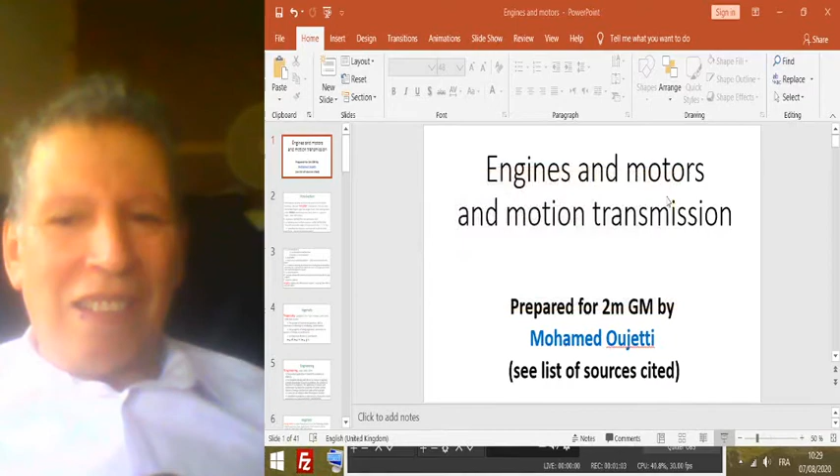Etymologically speaking, and according to the Merriam-Webster dictionary, this dictionary is an American dictionary. It was compiled and made by an American lexicologist by himself, so it is named after him. As you can see, there are people who are very committed to their own languages, to their own mother tongue, and they have devoted their lives to compile dictionaries.

The same thing could be said about Monsieur Littré. Le Littré is a French dictionary written by one man, and it's one of the best. By the way, he was a clerk in a bank, I suppose, and he had this passion for language, and he made a dictionary for himself. So this is a hint to whom it may concern.

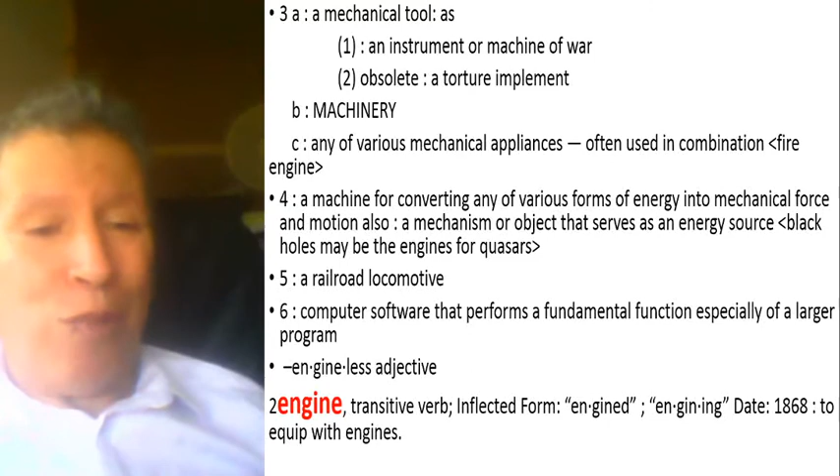There is the adjective engineless, without an engine. And engine, to engine as a verb, is a transitive verb, inflected form engined, to engine. يعني مشتقة من كلمة to engine. Engining. So it started in 1868, and it means to equip with engines, to engine a vehicle, to equip it with an engine.

Ingenuity means the power of creative imagination. So again, now we have the element of imagination and creativity, to create something that did not exist before, to create something useful for humanity, to use your imagination, to use your skill, to use your intelligence, your creativity.

And it also means the skill or cleverness in devising or combining things, in making, putting together, in combining. So these are the qualities at the root of engineering, the gifts that an engineer should have. This is what distinguishes an engineer from an ordinary person. Ingenuity means inventiveness, so an engineer must be inventive, must come out with new ideas, with new solutions.

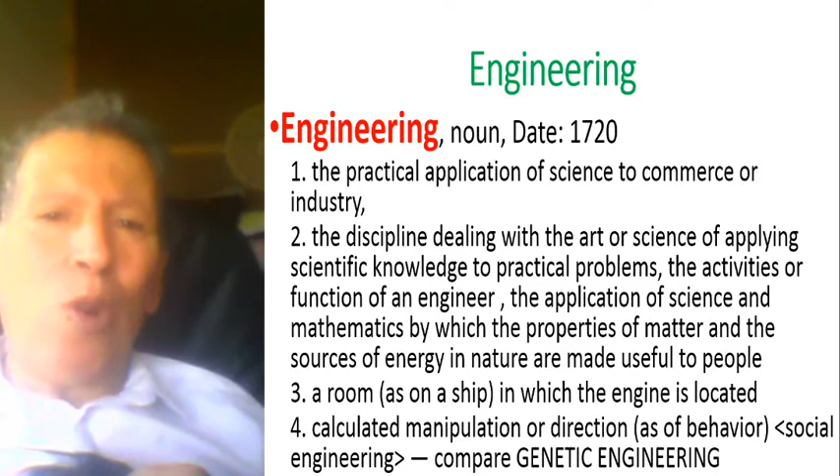An engineer is therefore a noun, pronounced engineer. Look at the stress: there's a weak stress at the beginning and a major stress on the last syllable. Etymologically, it comes from Middle English, engineour.

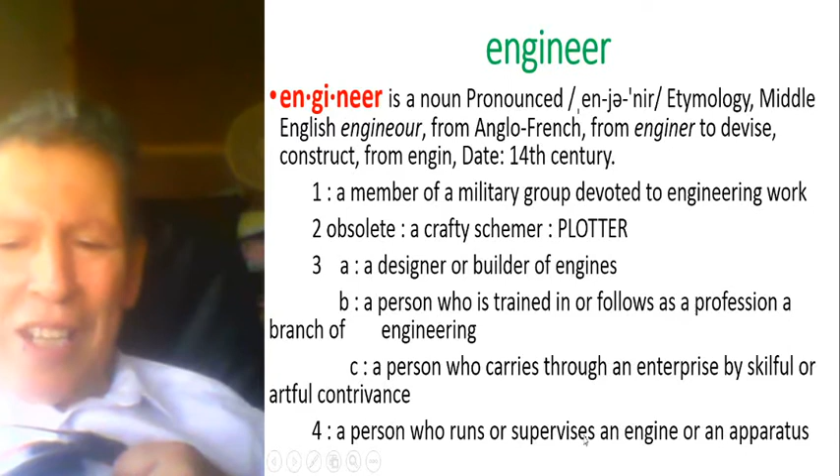Yes, what we call here technician, in the United States they call them engineer as well. So the borderline between engineer and technician is blurred, is removed, because an engineer is someone who supervises a machine and who runs it, is skillful at that, has a certain knowledge of engineering, and therefore does so. Many engineers in the full title do just jobs of supervision and running of engines.

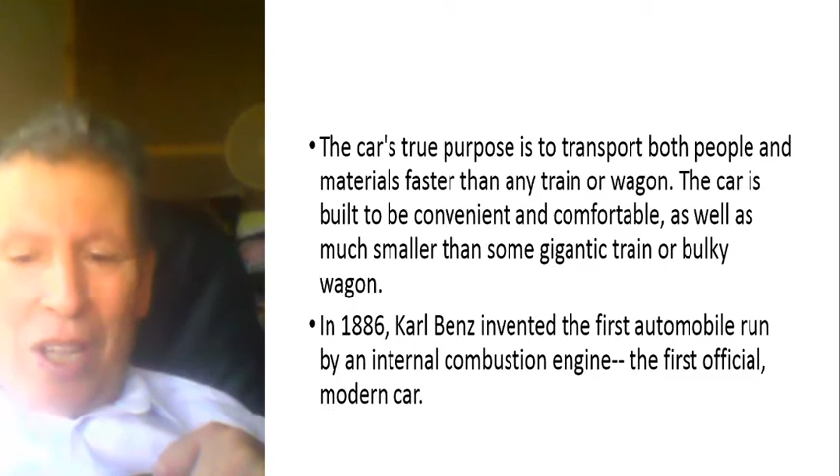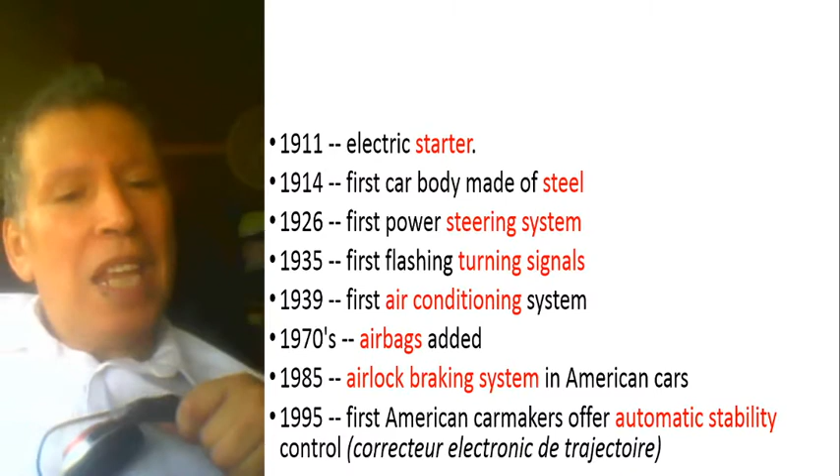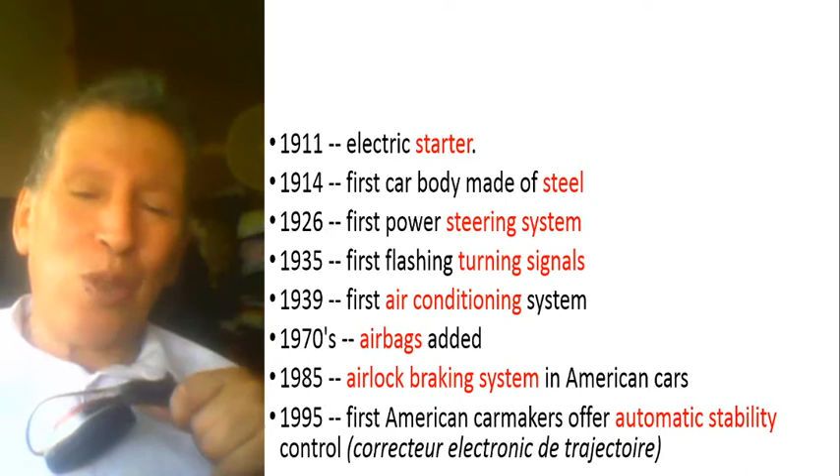1939, the first air conditioning system. I didn't know that - so early. But it was developed much better later. In the 1970s, the airbag was added. But again, the airbag went through different phases until it became as efficient and sensitive as it is today.

1985, the anti-lock brake system in American cars. Something to do with a braking system that has to do with hydraulics, which are airtight, no air in them.

1995, the first American car makers offer automatic stability control, which corresponds to 'correcteur électronique de trajectoire', to give the car more stability.

So the cars were first built to transport people and goods quickly and efficiently. This is the purpose, the objective for the engineer, to help humanity achieve certain things.

How people use it has yet to change from how they used it back then. They used it in the Great Depression, in the First World War, and they still use it in wars nowadays. It's a very important means of war. You can just have a look at what happened in Libya, those Toyotas.

Playing an important role, the car is built for the transportation of goods and people cross country, throughout countries. The earlier car was obviously not built for long distance as it used to inhale a lot of gasoline, but modern cars are very fuel efficient. Yes, the earlier cars were very greedy, guzzling, but nowadays they are more efficient, and a lot of work has been done in this area.

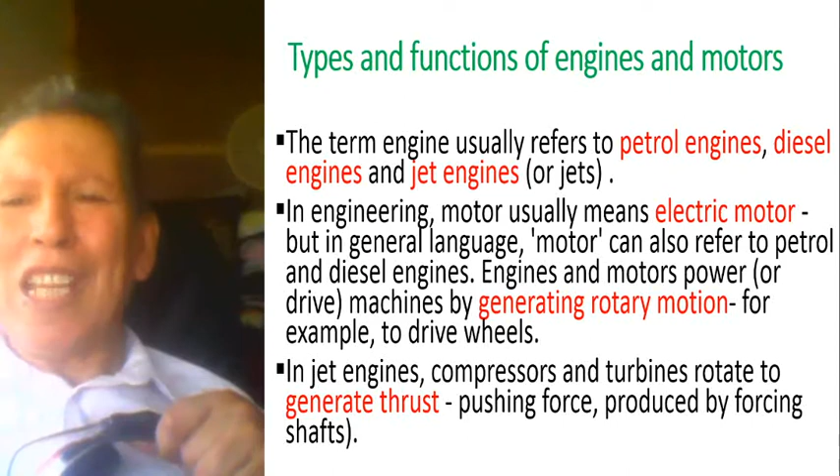The term engine usually refers to petrol engines, which is 'moteur à essence', diesel engines, and jet engines. The modern meaning of the word engine is used with petrol engines, diesel engines, electric engines, electric motors, and jet engines.

In engineering, motor usually means electric motor. So the word engine and the word motor: motor goes with electric, and engine goes with fossil fuel.

We could say automobile as much as we can say motor car, the word motor is interchangeable. Anyway, in engineering, motor usually means electric motor, but in general language, motor can also refer to petrol and diesel engines. Engines and motors power or drive machines.

They power machines by generating rotary motion, for example, to drive wheels. This is the job of an engine or motor, to create rotary motion, which is transmitted to wheels to create movement.

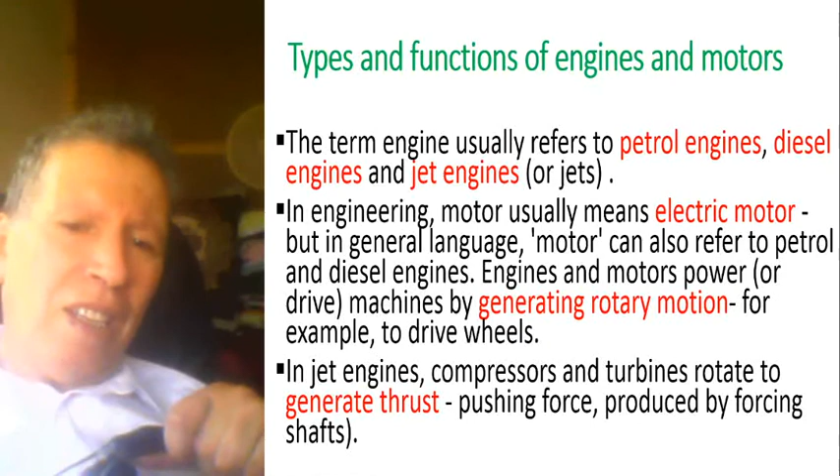In jet engines, compressors and turbines rotate to generate thrust, a pushing force produced by rotating shafts. So 'le moteur à réaction', a different system. Compressors and turbines rotate and generate thrust, they push air in the back so as to push the airplane forward.

How do we measure torque? And what is torque? We measure it in Newton meters. As an engine produces a couple, a rotary force, the moving parts of the machine it is driving will produce resistance due to friction and other forces.

As a result, torque, the twisting force, creating the movement, the twisting movement, is exerted on the output shaft of the engine. Torque, calculated as a turning moment in Newton meters, is therefore a measure of how much rotation force an engine can exert. So torque is the twisting force, measured in Newton meters.

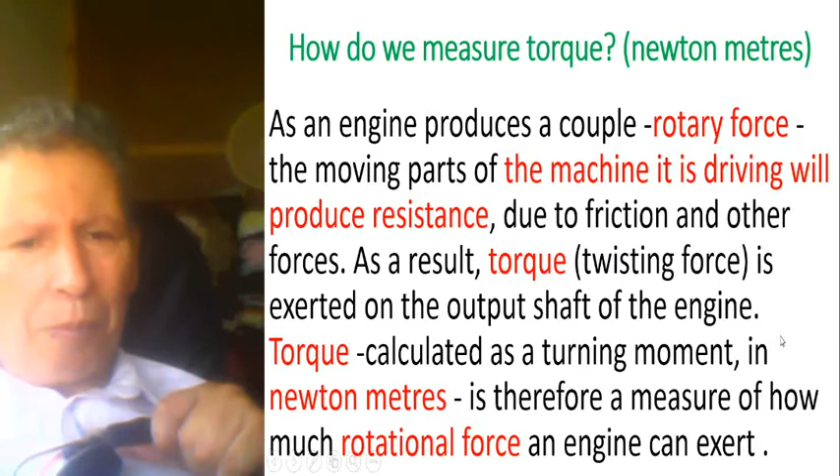And how do we measure engine power? We measure it by watts or brake horsepower. The rate at which an engine can work to exert torque is the power of the engine, measured in watts. So the unit of measurement of the rate at which an engine works is the watt.

Horsepower is a historic measurement of the power of an engine's output shaft, measured in horsepower.

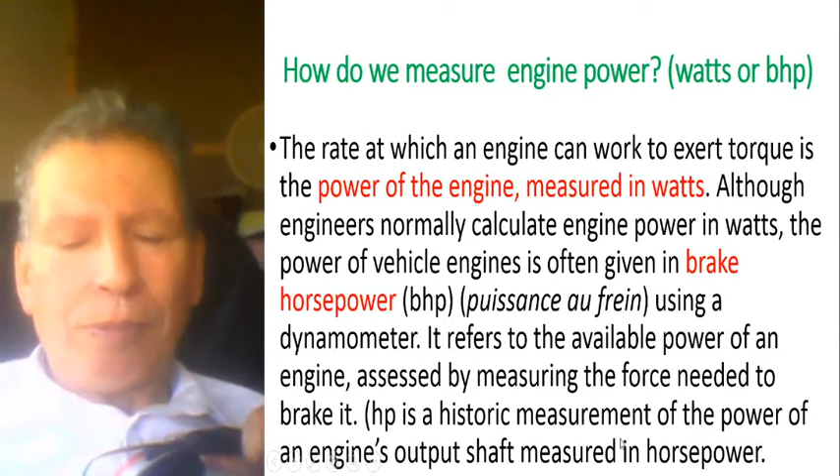Let us differentiate between certain words. British English: petrol, which means 'l'essence'. In American English, it's called gasoline. Gasoline in American English means petrol, and in British English it's called petrol. And 'le pétrole' in French is petroleum. In British English: petrol engine. In American English: gasoline engine, gas.

There is another German called Rudolf Christian Karl Diesel, who lived between 1858 and 1913. He was a German inventor and mechanical engineer, so he's an ancestor for you. He was famous for the invention of the diesel engine and for his suspicious death at sea. Well, that's none of our business, he was probably murdered, but anyway, you can read about that if you want. So he's very well known for inventing the diesel engine.

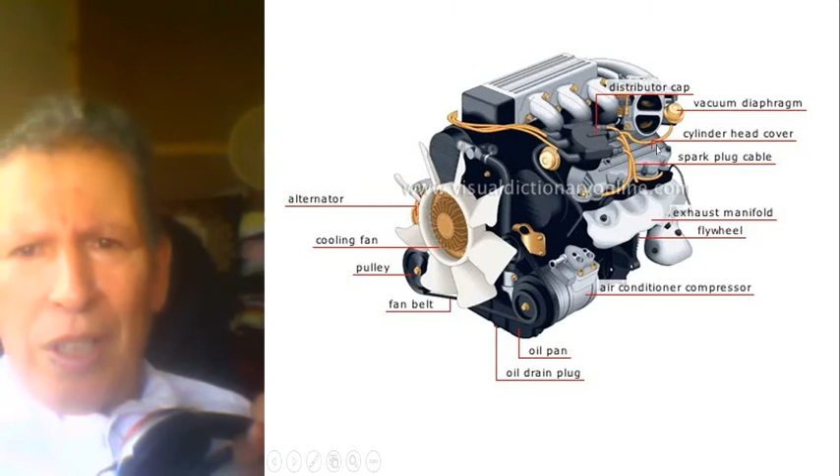The spark plug cable. These are cables for the sparks. There should be four normally, four plugs. 1, 2, 3, 4. So there are four. Distributor cap.

The vacuum diaphragm. Cylinder head cover. So there are four cylinders at the bottom, and this is the cylinder head cover.

Air conditioning compressor. So this is not an alternator. The alternator is on the other side, and this is the air conditioning compressor. So they are all used by one or several belts. So these are words for the parts of an engine.

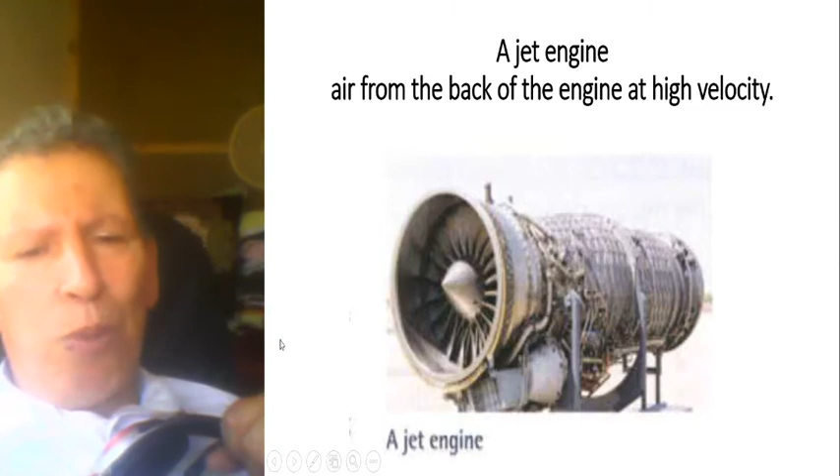Internal combustion engines. Petrol and diesel engines are internal combustion engines. So there is a burning which takes place inside the engine. This means they are driven by combustion, by burning of fuel in enclosed sealed spaces called combustion chambers.

I think this is a very clever thing to think of in the first place. Somebody imagined how to burn fuel in an enclosed chamber to produce movement, to produce an explosion, and to exploit that explosion to produce movement. This is very ingenious indeed.

In petrol and diesel engines, the combustion chambers are cylinders, surrounded by a cylinder block and closed at the top by a cylinder head, as we have just seen in the picture. Each cylinder contains a piston.

It's a very complex device, isn't it? It must have been very difficult to create and to make.

The number of piston cylinders in an engine varies. Engines in small motorcycles have only one, like the 103 for example, which has one piston.

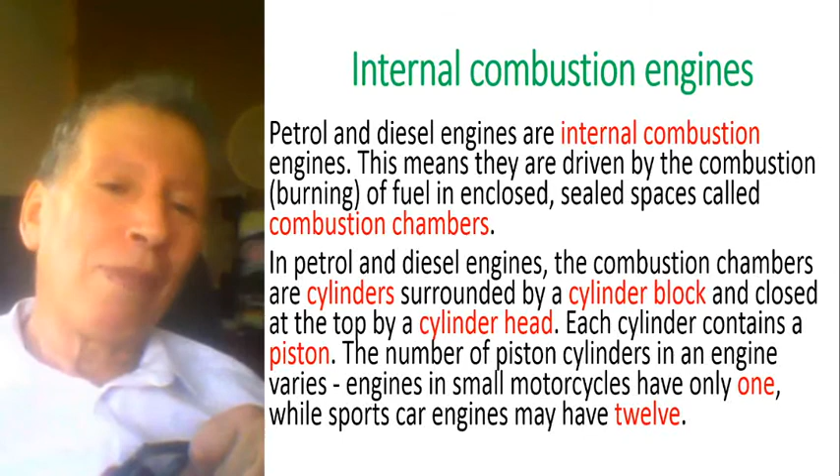While sports car engines may have 12, but ordinary cars have 4.

Fuel is supplied to each cylinder from a tank, a reservoir. In most engines, the flow of fuel is generated by a pump, the fuel pump. So there is a pump which regulates the flow of petrol to the engine, which forces it at

high pressure through fuel injectors. These vaporize the fuel, allowing it to mix with air.

So there is an operation of vaporization of the fuel. It needs to become vapor, not liquid. It needs to mix with air to become sort of gas.

Allowing it to mix with air, using this mixture of fuel and air, most engines function as 4-stroke engines. It is called 4-stroke engines, meaning they work on a cycle of 4 stages, 4 strokes, moving in 4 phases. This means they work on a cycle of 4 stages or 4 strokes.

A stroke is an upward or downward movement of a piston. So up and down, plus 2 more.

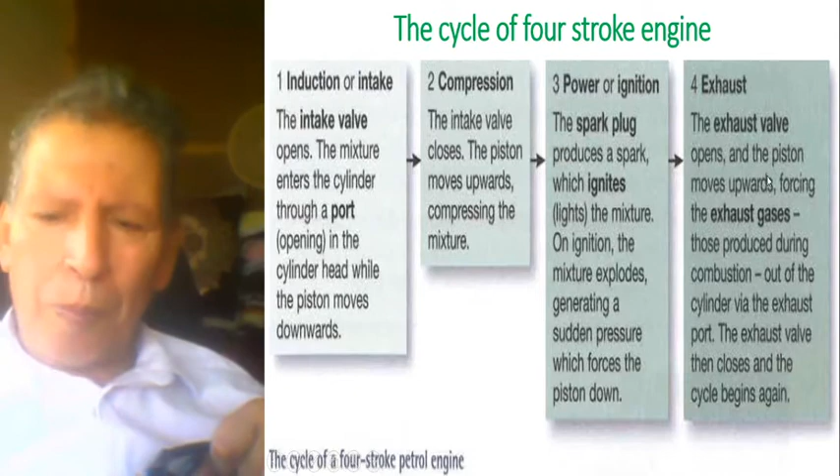So the 4-stroke engine: induction or intake, compression, power or ignition, and exhaust. I don't need to go on through all that.

Now let me move on to transmission of movement. And transmission is done through gears - gears meaning the toothed wheels, the clutches.

A set of toothed wheels, a gear is a set of toothed wheels that work together to alter the relation between the speed of a driving mechanism.

So it's not enough to create an engine, an internal combustion engine. It's already a complex thing. You need to devise, to find a way how to transmit the movement from the engine to the wheels of the vehicle. So you need gears.

Gears are very important, an important piece here. So they are a set of toothed wheels that work together to alter the relation between the speed of a driving mechanism, a mechanism which drives, such as the engine of a vehicle or the crank of a bicycle.

So it's the same thing with a bicycle. The only difference is that the movement in a bicycle is created through a physical pressure on the pedal.

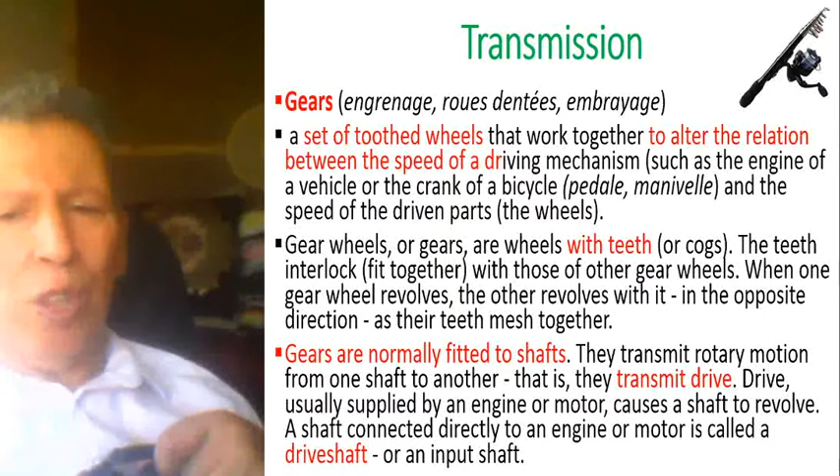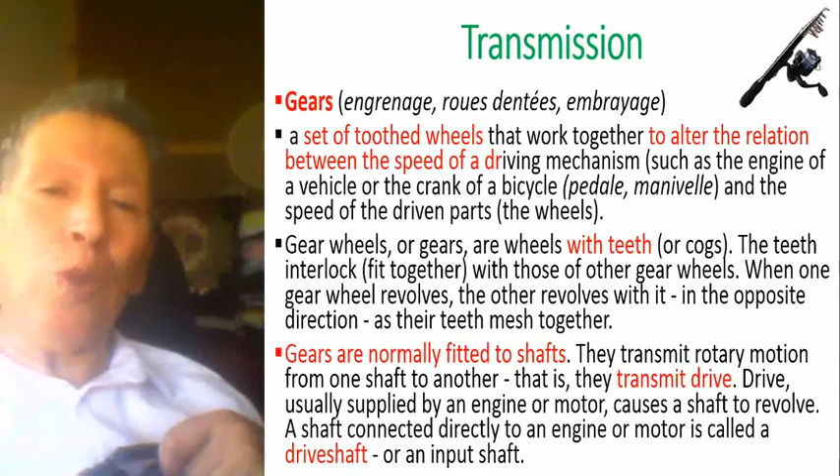A shaft connected directly to an engine or motor is called a drive shaft. The one which is fitted to the engine is called the drive shaft or an input shaft. So there are input shafts and output shafts, drive shafts and followers. A gear wheel on a drive shaft is called a driver.

To drive means to make something move, to push, to activate. A gear wheel on a drive shaft is called a driver. The second gear wheel, which meshes with the driver, is called a follower. So driver, follower. The driver drives the follower, and it cannot be the opposite.

An assembly of several shafts and gear wheels is called a gear train, or transmission system. Transmission of movement begins with an input shaft and ends with an output shaft. I hope this is clear, understandable, and memorable, especially memorable.

The system may contain idler gears, intermediaries, that is, they are intermediary, middle gears. These change the direction of a follower.

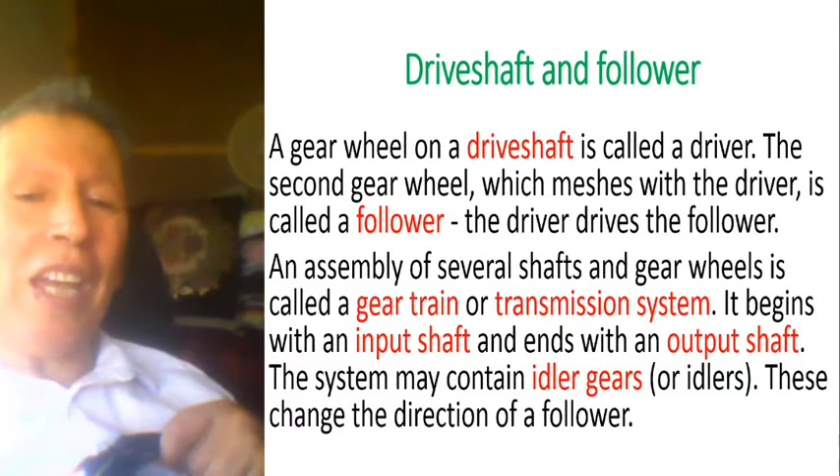Like this: here we have a driver which goes in the clockwise direction, but the follower is going in the counterclockwise direction. There's a shaft here and a shaft there to take the movement in that direction.

However, here we have a driver clockwise, the idler in the opposite direction. However, the next follower is going in the same direction as the drive shaft.

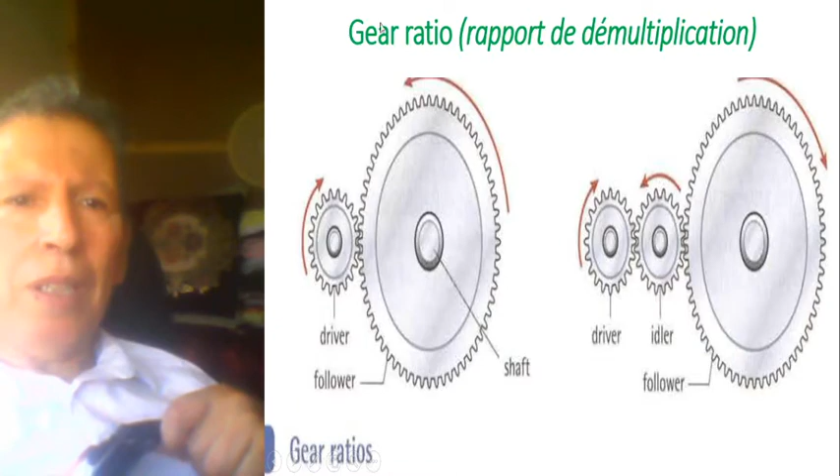Gear ratio, which means rapport de démultiplication. Gears can provide a mechanical advantage by using different gear ratios, that is, not the same speed, not the same ratio of movement.

In the diagrams above, the driver has 20 teeth and the follower has 60. Therefore, the driver rotates 3 times to make the follower rotate once, so the gear ratio is 3 to 1. This means that if, for example, the input speed, the speed of the driver, is 3000 RPM, the output speed of the follower is 1000. It's a third of the original.

And of course, you can change that. You can change them by making the follower with a larger number of teeth or cogs, or with a smaller number of teeth or cogs, small in size.

Okay, let's move on to talk about manual versus automatic gearbox. In some machines, a gearbox, la boîte à vitesse, is used to provide a number of different gear ratios. This is the job of the gearbox: la boîte à vitesse, 4 vitesses, 5 vitesses, 6 vitesses.

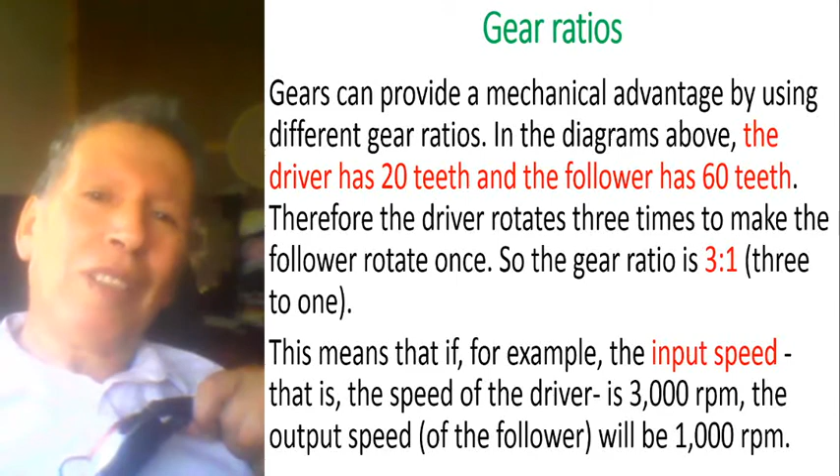Therefore, the driver rotates 3 times, etc. So in some machines, a gearbox is used to provide a number of different gear ratios. A gearbox has a gear selection system, so you need to select.

You have the gear stick, which allows gears to be changed or shifted while the transmission is running. You don't need to stop the car to change gear. While the transmission is going on, you can change gears smoothly, shifting from one gear ratio to another without stopping.

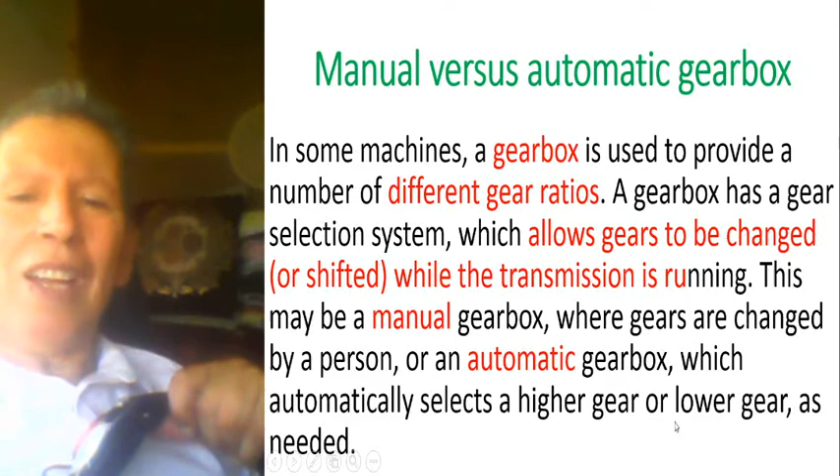This may be a manual gearbox, the classic one which many people like, where gears are changed by a person, or an automatic gearbox, as in modern cars, which automatically selects a higher gear or lower gear as needed.

When you get a fish, you can use this device, using the pedal or the reel, to move the line quickly and effortlessly.

Types of gear wheel. There are different types, as you will see. There are spur gears, engrenage cylindrique. You can bring them out in different shapes and forms depending on the function you want them to do. Spur gears are the simplest gears; the teeth run straight across the wheel.

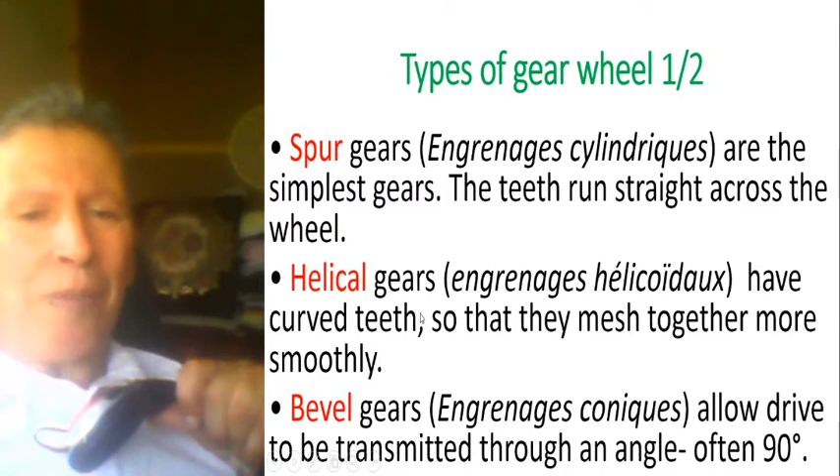And the bevel gears, engrenage conique, like a cone, allowing drive to be transmitted through an angle, often 90 degrees. Extraordinary. So all you need is strong, hard material to create gears able to transmit movement in different directions with the minimum loss of energy or minimum resistance.

There is another type of gear called the crown gear, engrenage de couronne, which also transmits drive through 90 degrees, often to a small gear called a pinion. The pinion is usually small and the crown gear is larger, and both transmit movement or drive at 90 degrees from one direction to the other.

Finally, there are worm gears, engrenage à vis sans fin, which transmit drive through an angle and allow a low output speed relative to the input speed of the worm. They can provide a one-way drive, as a worm can drive a gear, but a gear cannot drive a worm. It has one-way direction, or else the mechanism will lock.

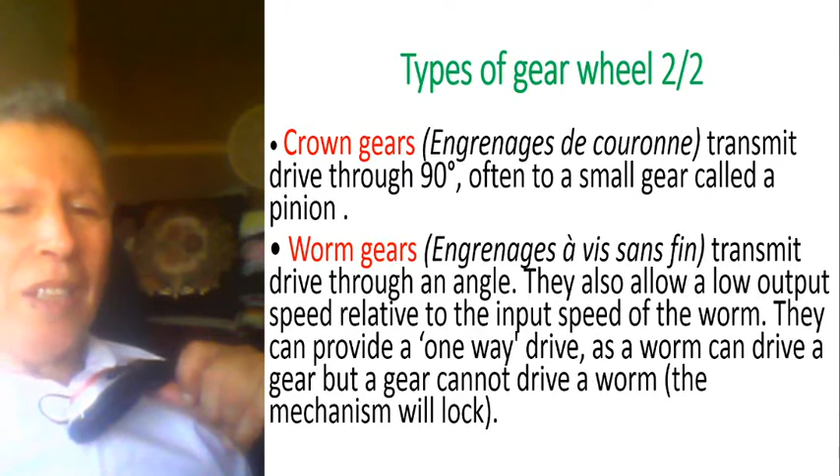I've seen this system in an overhead projector, in a data show projector, which automatically, when started, raises from the surface to adjust towards the screen, and there is a worm gear mechanism, as we shall see in the picture.

This is a worm gear mechanism. This is a gear, and this is the worm. C'est un vis sans fin.

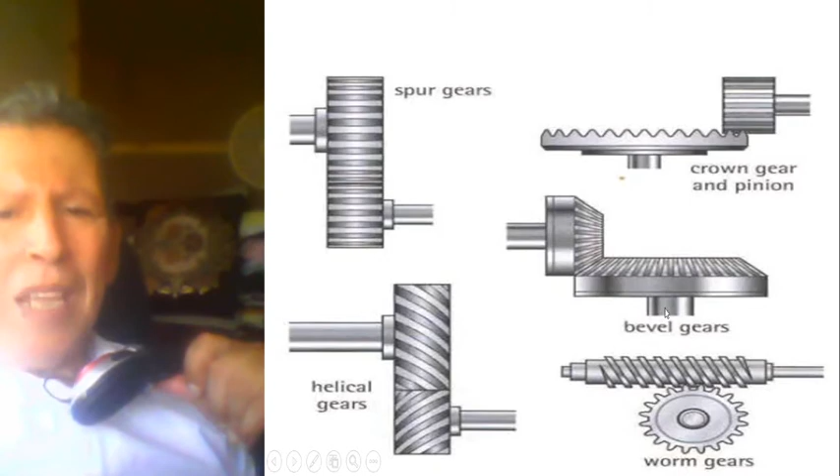The bevel gear has a conical shape. As you can see, the pinion here has a conical shape, and this gear here also has a conical shape.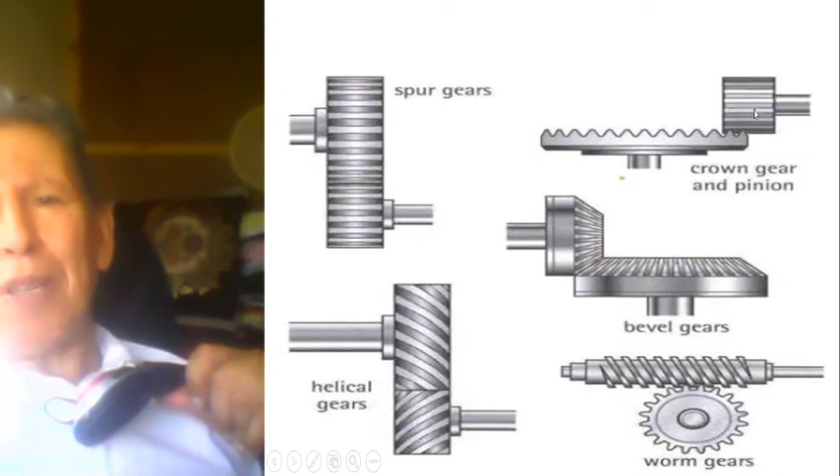This is a crown gear. It looks like a crown indeed, and here is the pinion, which is a straight, simple gear. Spur gear is direct, and this is a helical gear.

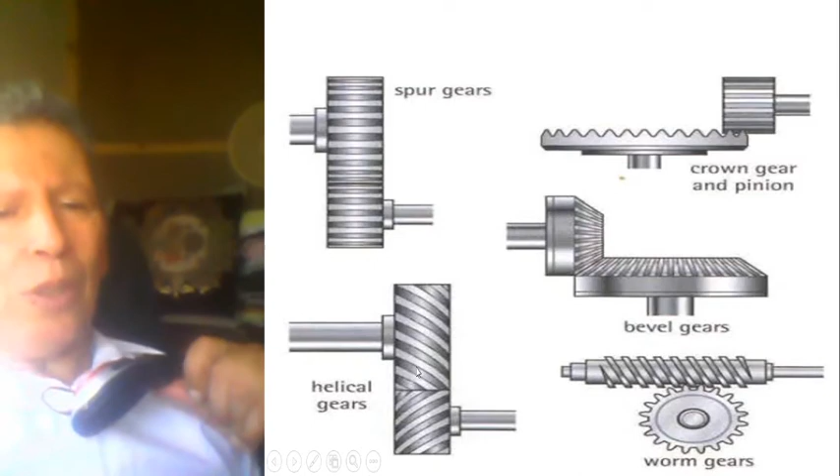As you can see, the teeth are not straight.

Spur gears, engrenages cylindriques, are mounted in series on parallel shafts. So there should be a shaft here, a shaft here, a shaft there, and movement is moved from this one to there, to there, to there.

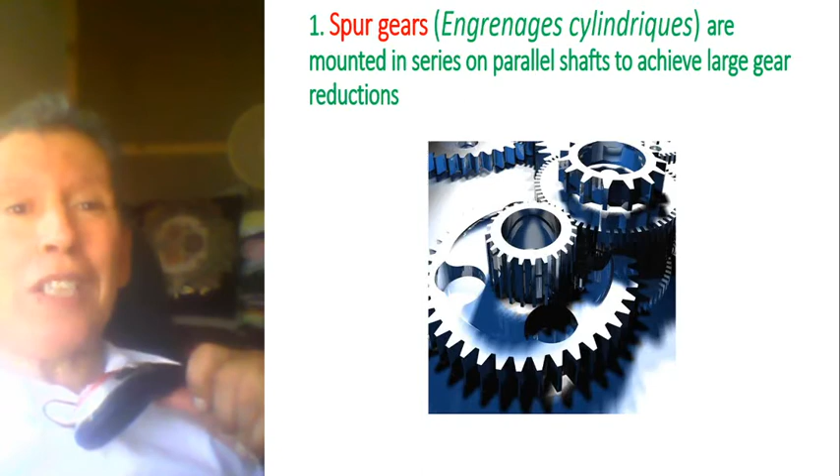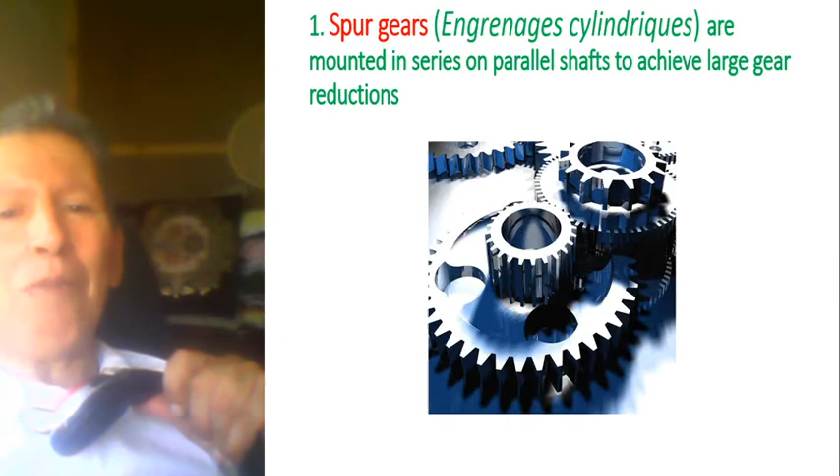I remember this in old clocks. They contained spur gears arranged in this order to create different drive ratios, one for the minutes, one for the seconds, and one for the hours, probably.

I hope this is a good example: parallel shafts to achieve large gear reductions. In those clocks, you don't have bevel or crown gears, because you needed movement only in one direction.

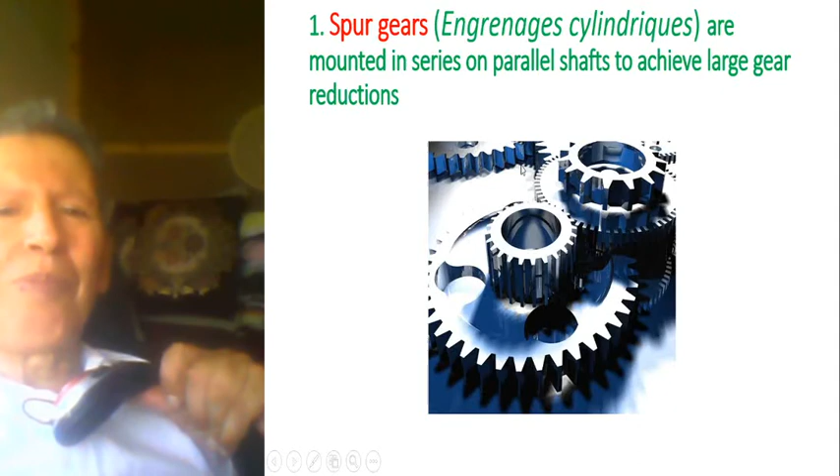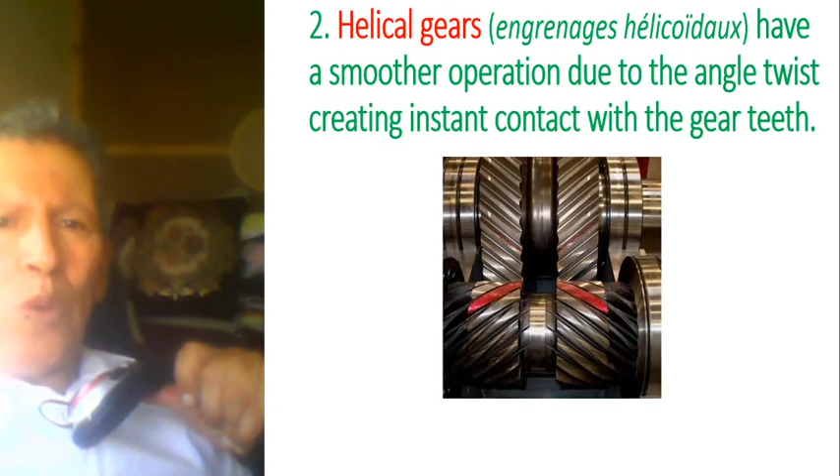Here are helical gears, engrenages hélicoïdaux, which have a smoother operation due to the angle twist, creating instant contact with the gear teeth. Probably they have a certain advantage to being helical, giving them smoother operation.

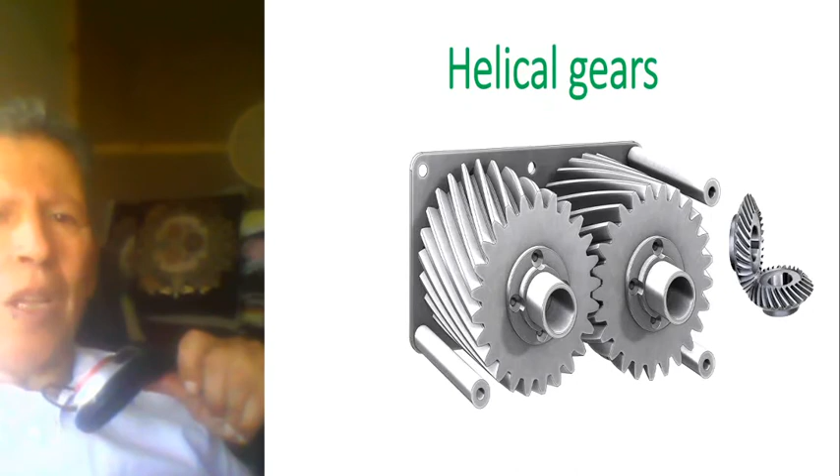These are helical gears, although they are on parallel shafts. The first ones are on parallel shafts, but here these are bevel gears that are also helical - helical bevel gears.

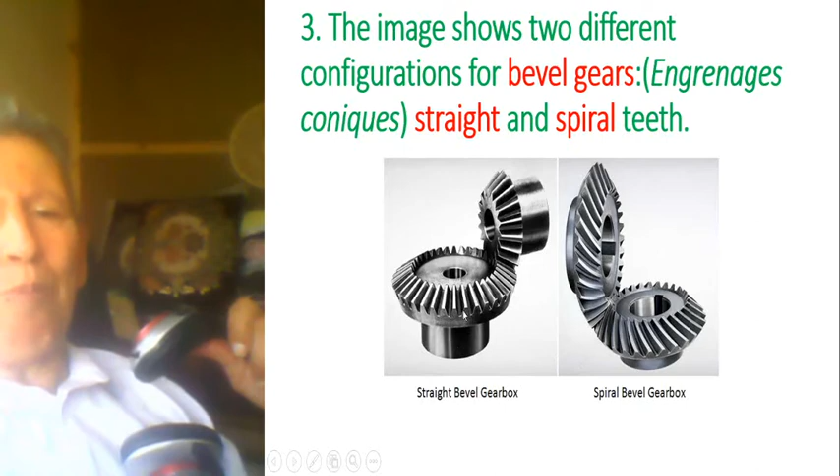Two different configurations of bevel gears: this one is straight, and this other one is spiral or bevel - a spiral bevel gear. This one is also bevel because it's conical.

This cross-section of the motor in this image demonstrates how spiral bevel gears, engrenage conique, are used, transforming or transmitting movement in different directions, at 90 degrees.

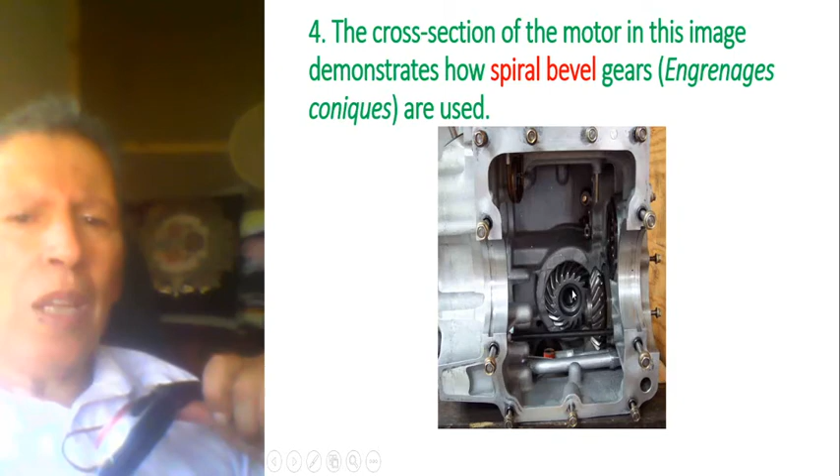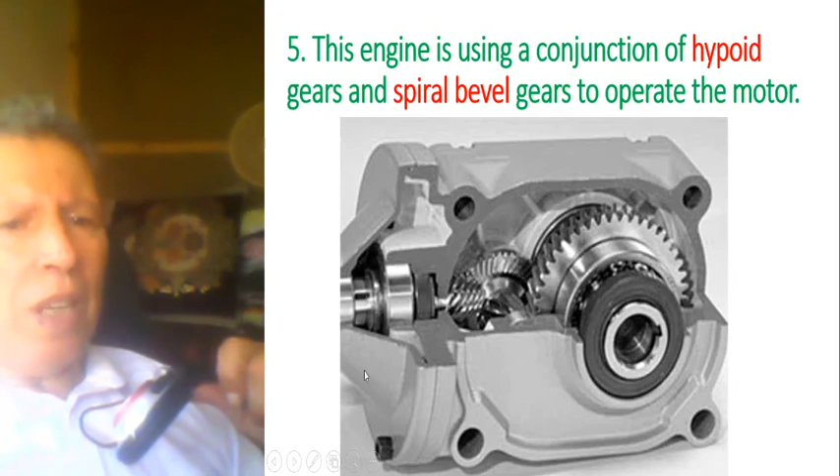This is a better example perhaps, using a conjunction of hypoid gears and spiral bevel gears to operate the motor. So the shaft here, the movement is like this, but this movement will go this way.

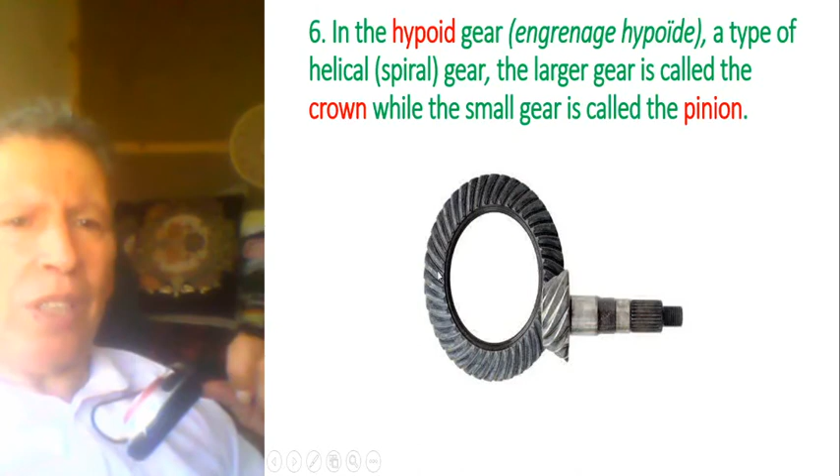This is the hypoid gear, engrenage hypoid, a type of helical spiral gear. The larger gear is called the crown gear, while the small gear is called the pinion.

This is an example of the worm gear, engrenage à vis sans fin.

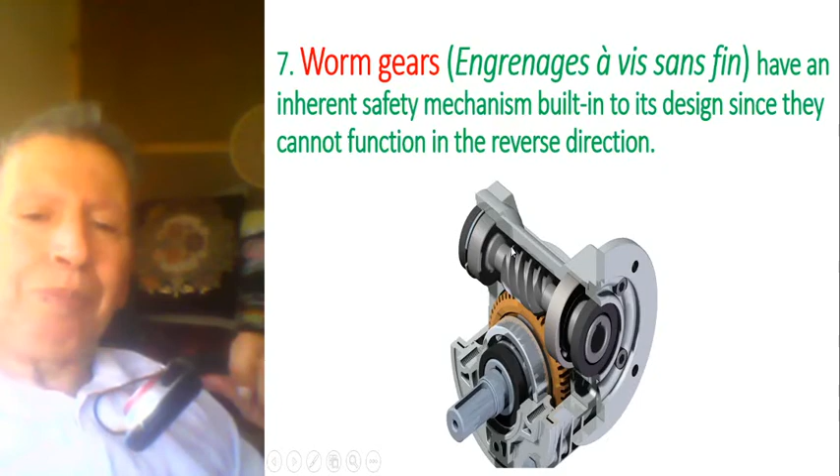What materials are gears made of? Gears are made of carbon steel for structural machine usage, and their characteristics depend on heat treatment applied - low carbon steel, high hardness obtained by carburizing. So steel is the material, or carbon steel.

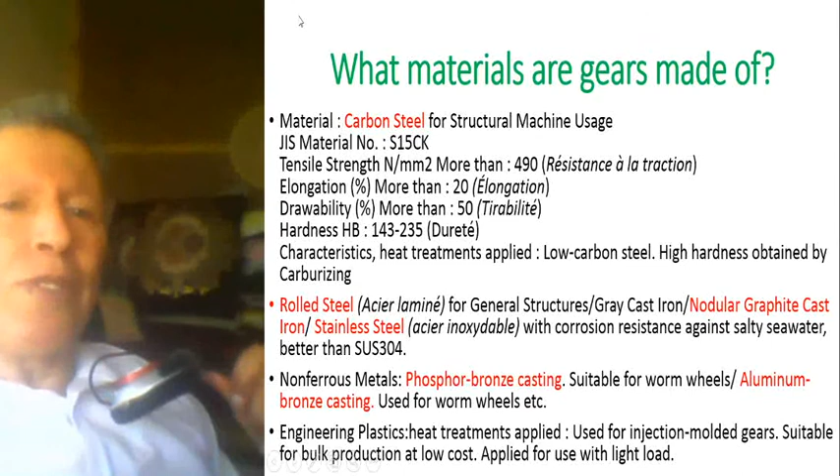Gears can also be made of non-ferrous metals, phosphor bronze casting, suitable for worm wheels, and aluminum bronze casting - a mixture of bronze and aluminum, used for worm wheels.

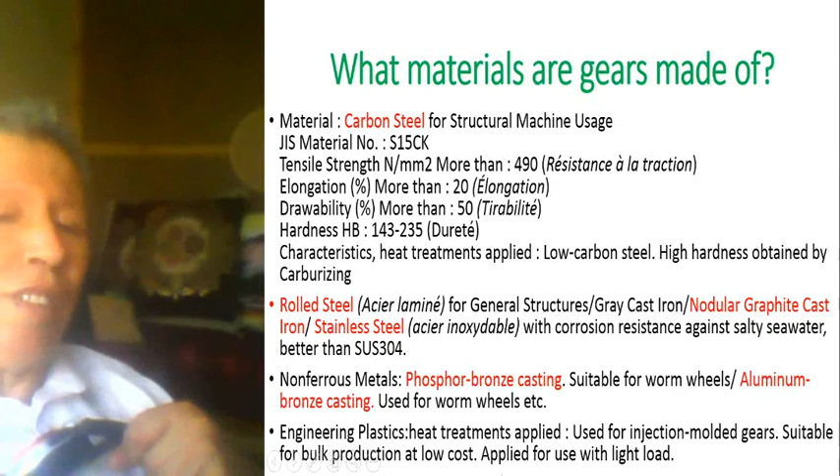Engineering plastics, also with heat treatments applied, are used for injection molded gears, suitable for bulk production at low cost, applied for use with light load. It depends on the usage - is it heavy duty or something light load? So you can use plastics, aluminum bronze, phosphor bronze.

And also rolled steel - rolled steel, c'est l'acier laminé - nodular graphite cast iron, and stainless steel, with corrosion resistance against salty water, seawater, better than this reference.